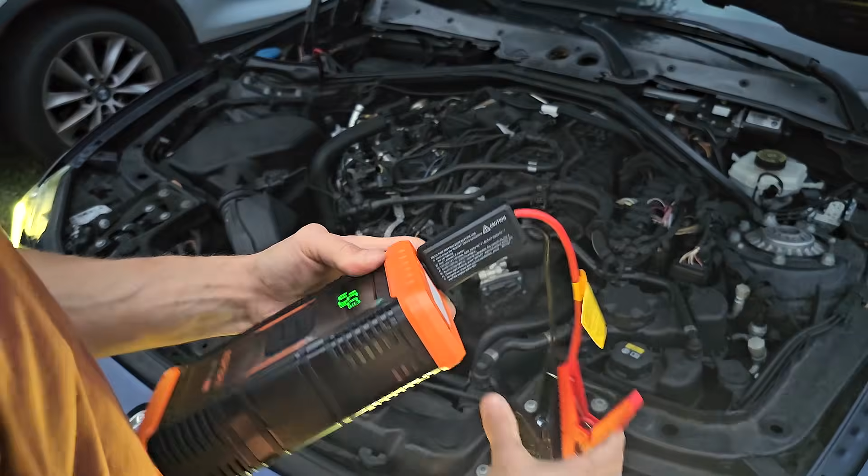So this is a good occasion to test my Asper X 3000 amp jump starter. I will connect this here, positive to positive, negative to negative. I need to push this button. Let's see now, let's try again.

Oh, perfect. Okay, let's drive this car in the shop.

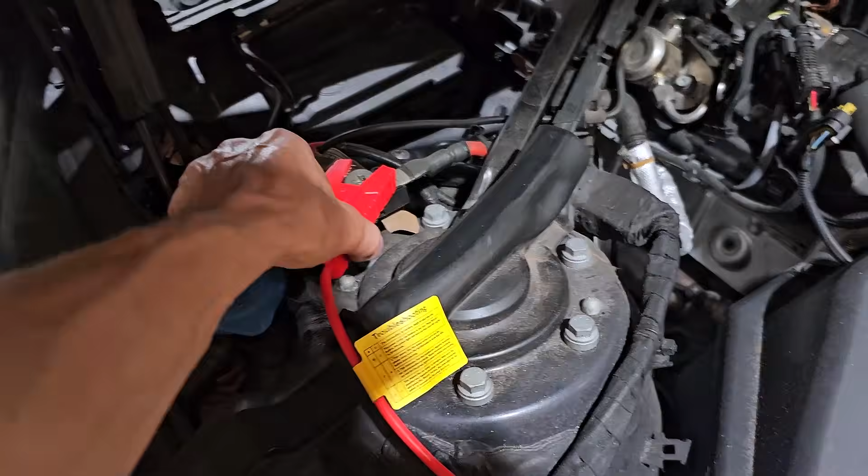So I made it in the shop. What you can see here, this was the actual state of this car. Let me disconnect my jump starter. So yeah, this thing, it's working. I'll put it here. So I diagnosed this car.

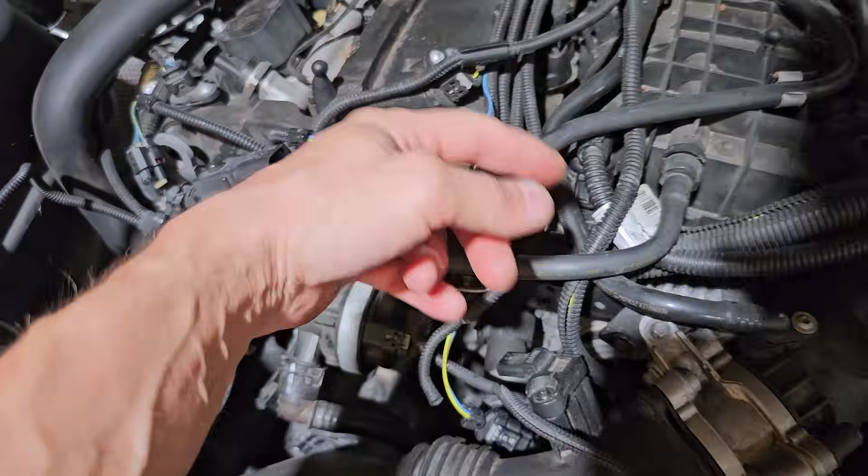I did some checks on the field. I disconnected a couple of plugs, but I didn't pull the harness like this. This was done by someone else, you can see. Even they cut wires. I think all the parts are inside of the car. Also, the accelerator pedal was unscrewed, removed. They cut the wires, they did some checks, but the way that they worked on this car was a barbaric way of working on vehicles.

Oh yeah, so I have parts here. That's a good thing.

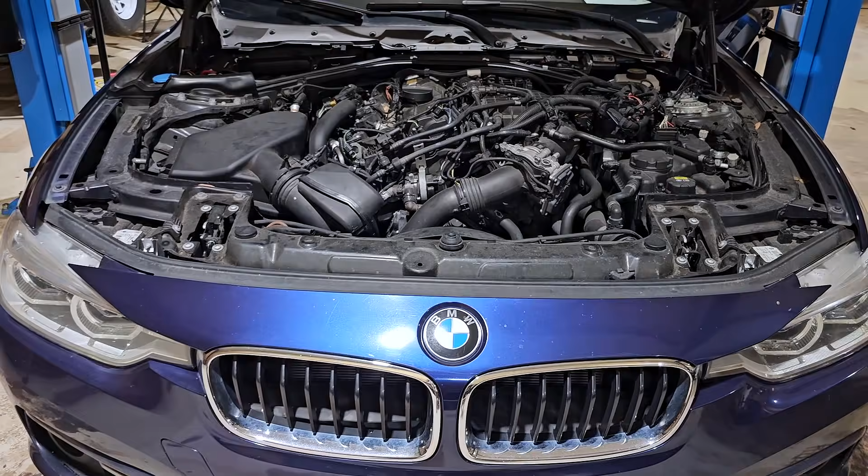So from what I know from the owner, this car was in a specialized Euro shop here in Orlando over a year ago. They diagnosed this problem and they replaced the DME because there is a short circuit on a 5 volt line, an internal short in the DME. They replaced the DME, they charged the owner, they cloned it, I don't know what they have done, and the car is doing absolutely the same thing.

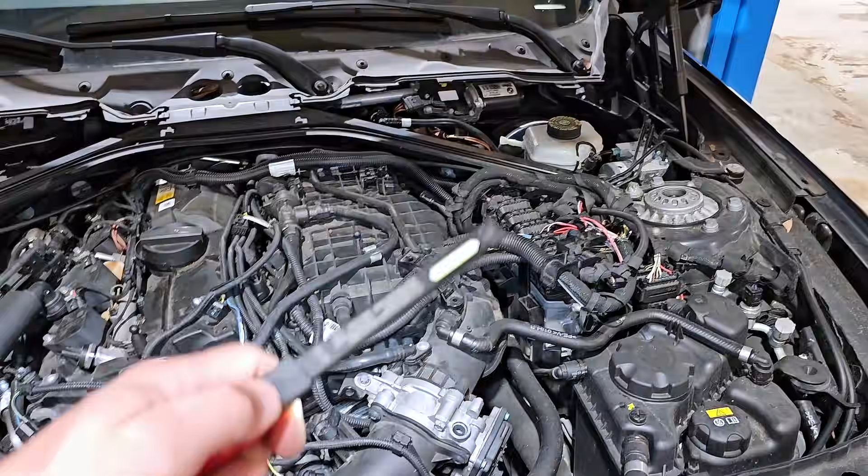I asked the owner about the original DME, if he has it, and he told me he doesn't have it. I asked him, hey, call back that shop to take back your DME because I'm pretty sure that your original DME is fine, especially when you have exactly the same problem with a replacement DME. So your DME is fine. He told me he tried to call them, but it's been over a year and they don't have it anymore.

So at this point, let's start to diagnose it together. I will show you my steps that I will take, and I will try to diagnose to see what is the deal with that short circuit.

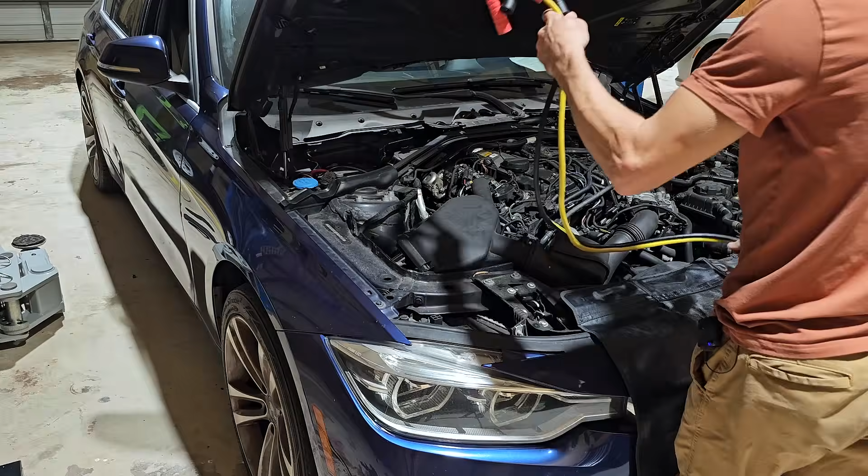First thing, I need to connect a battery maintainer, voltage maintainer on this car because the battery is dead. Plus, minus. Yeah, so you can see the battery is not maintaining voltage anymore.

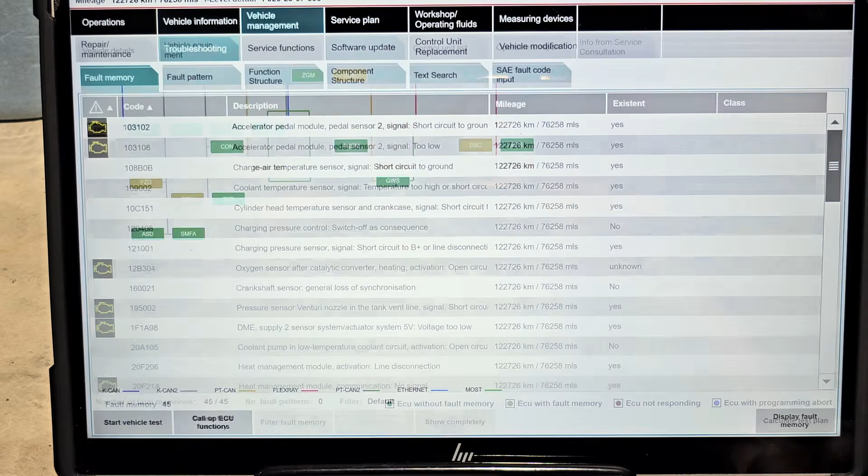Let's resolve that. And after that, I will connect ISTA and I will scan the vehicle. So after scanning the car, I have a bunch of errors, but most of them are caused by that weak battery. So I will display the fault memories. I will take a look, crankshaft sensor, heat management module.

So all these modules are disconnected from this network. They are unplugged because I told you I also worked and tried to see if I can find out something quick in a parking lot, but that didn't happen.

So you see, DME supply 2, sensor system actuators, system 5 volts, voltage too low, and it's present, voltage too low. So this error is in the DME. The DME is in charge of providing these 5 volts. Also, we have a bunch of other errors.

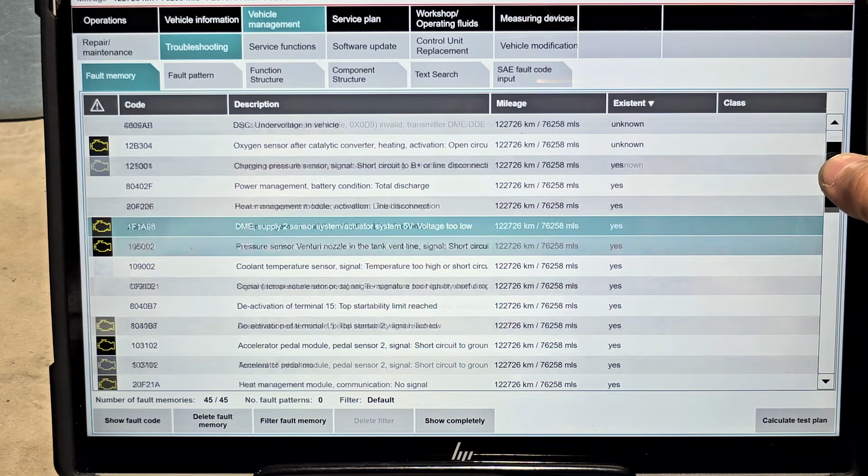Let me go like this to have all the present errors on top. Pressure sensor venturi nozzle, deactivation, terminal 15 for the battery. Accelerator pedal module, pedal sensor 2, signal too low, present. I think this is one of those cut wires on the DME.

But first, the most important thing is to save a report before doing anything else on the car. Next, I will delete the fault memories to work only with the present errors, because that will be way easier and quicker to calculate and execute a test plan.

Okay, so we ended up with 13 errors. DME, transmission and ICM, everything is green.

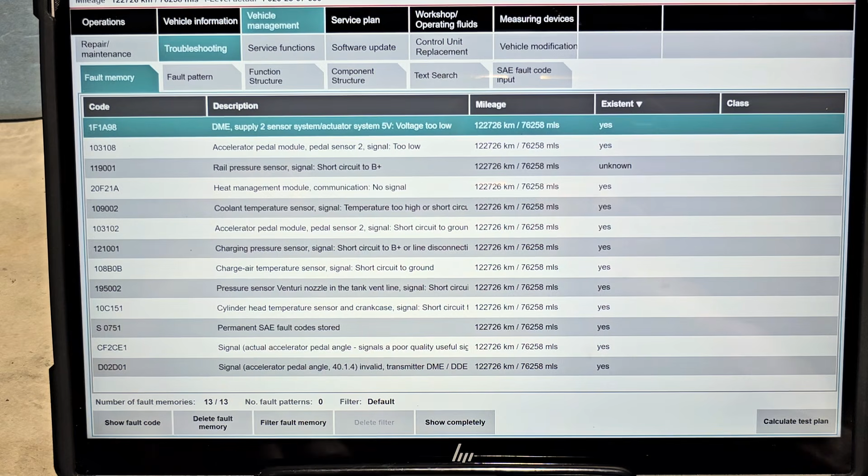So we have DME supply 2 sensor system actuator system 5 volts, voltage too low and is present. Accelerator pedal, rail pressure sensor, heat management module, coolant temperature sensor, accelerator pedal module, charge pressure sensor, charge air temperature, pressure sensor, venturi nozzle, cylinder head temperature sensor and crankcase, permanent SAE fault code stored because of those.

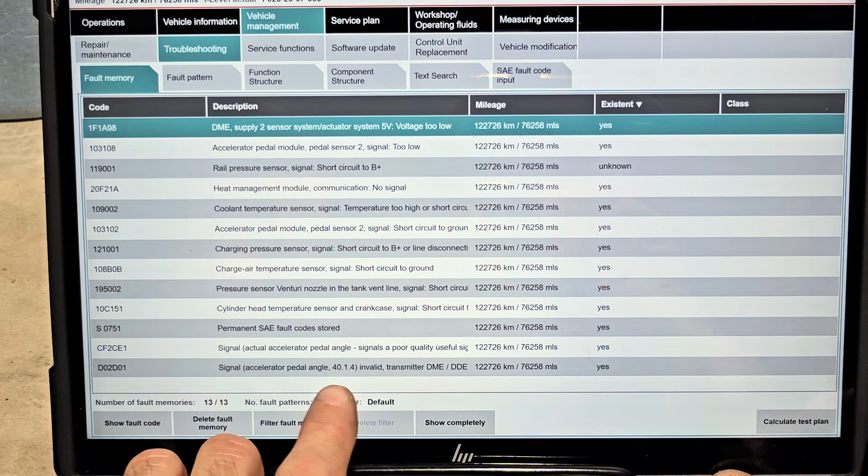And signal, let's see, let's show completely. Signal poor quality use, signal. So yeah, those two errors on the ICM and transmission are caused by the DME because of all these errors.

Now let me see, I'm curious to see what is the service measure for this error. For example, measure in service.

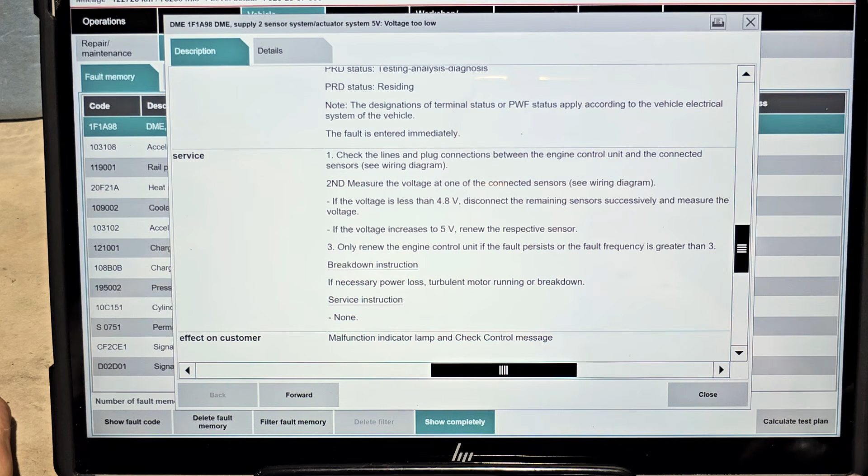Let's see here. Check the lines and plug connection between the engine control unit and connected sensor. See wiring diagram. Second, measure the voltage at one of the connected sensors. See wiring diagram. If the voltage is less than 4.8 volts, disconnect the remaining sensors and measure the voltage. If the voltage increased to 5 volts, renew the respective sensor. Only renew the engine control unit if the fault persists or the fault frequency is greater than 3.

Breakdown instruction if necessary: power loss, turbulent motor running or breakdown. And the effect on customer: malfunction indicator lamp and check control message.

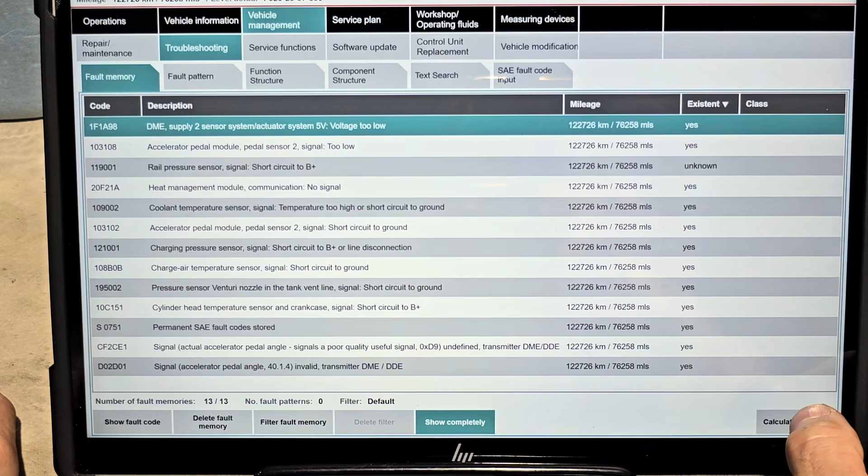Okay, let me calculate a test plan because I need to see the wiring diagram and work on that. So let's remember, we have a test plan for the accelerator pedal, charge pressure sensor, coolant temperature sensor, heat management, intake pipe pressure sensor, venturi nozzle, temperature sensor, high pressure fuel system.

Okay, let's select, because ISTA gives us the most important at the top, the second one, sorry, we'll select the second one. Sensor system supply 5 volts, we'll calculate the test plan.

DME supply 2 sensor system, actuator system 5 volts. Again, we have the same information here on the details.

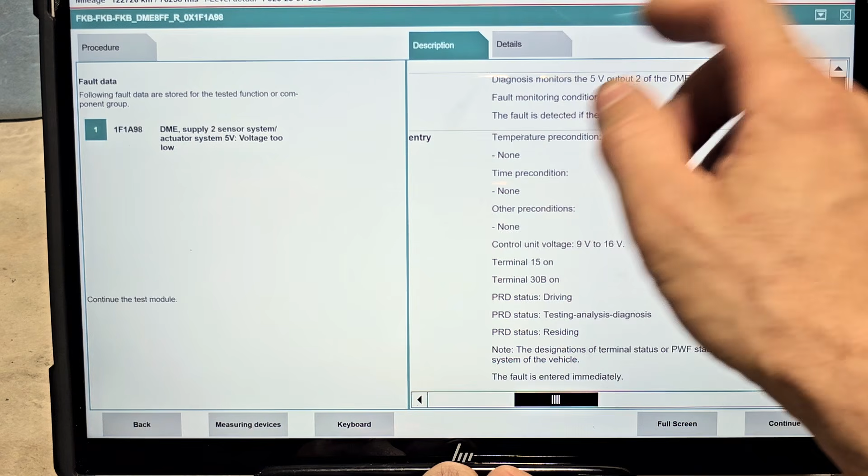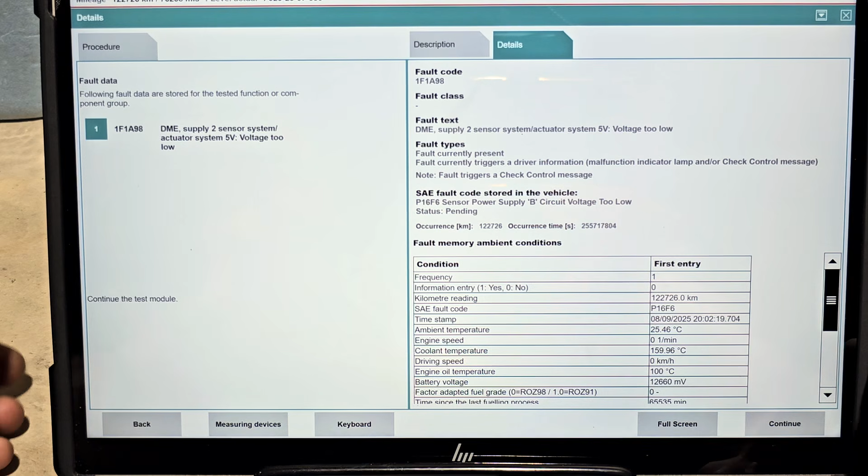Supply sensor 2, voltage too low, fault currently present. This is a good thing because it's easier to work with a fault that's present. Let's select that one, let's go ahead.

Check sensor wiring and plug connection, check control unit and test module. Let's say check sensors first, wires and plug connection.

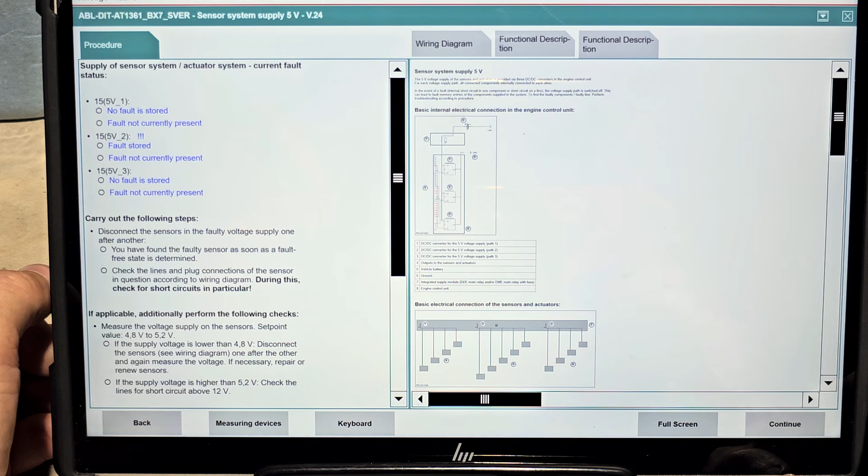So supply of sensor system, actuator system current fault status. So on line 5V1, no fault. 5V2, fault stored, fault currently present, and 5V3 is the same, no fault.

Let's go in the wiring diagram. Let's see what is the deal with the 5V2.

So for this I will go here in full screen. I will extend this wiring diagram. So this big thing from here is the DME, digital motor electronic, and everything here are sensors.

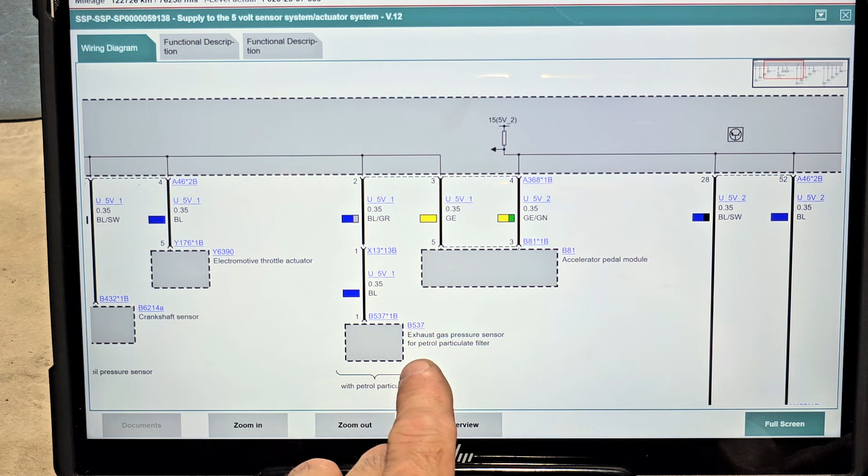Inside of the DME, you see we have a branch here that will supply these branches for 5V1. 5V1 will supply throttle actuator, crankshaft sensor, engine oil pressure sensor, exhaust gas pressure sensor for petrol particulate filter, and half of the accelerator pedal module.

The other half of the accelerator pedal module, the 5 volts, will be supplied by 5V2. So we have a problem. We saw that we have a problem on 5V2.

Okay, go back full screen. So on this particular line there is a short circuit, and also we have the 5V3, but this line is again healthy. So from what I see here, the 5V2 will be provided by the DME to 3 different plugs.

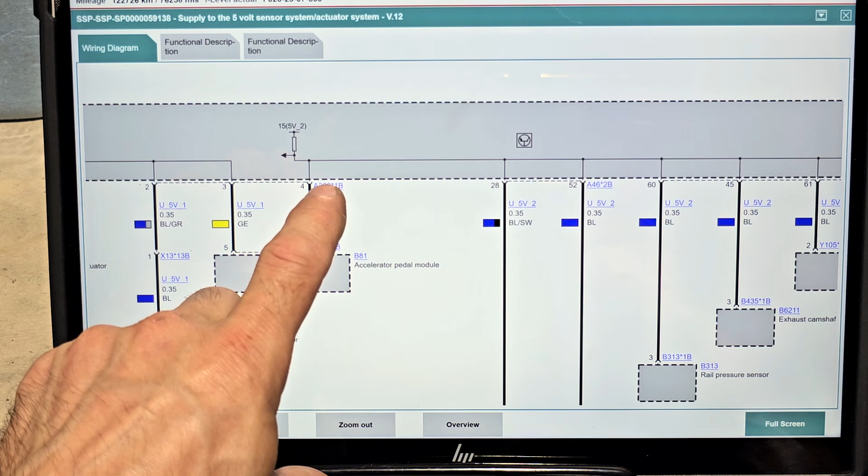I know that because I can see here this pin for the accelerator pedal module, it's in plug A368-1B. These two supplies are on A46-2B, and the rest of them are in A46-3B. So let's see which plugs are these ones.

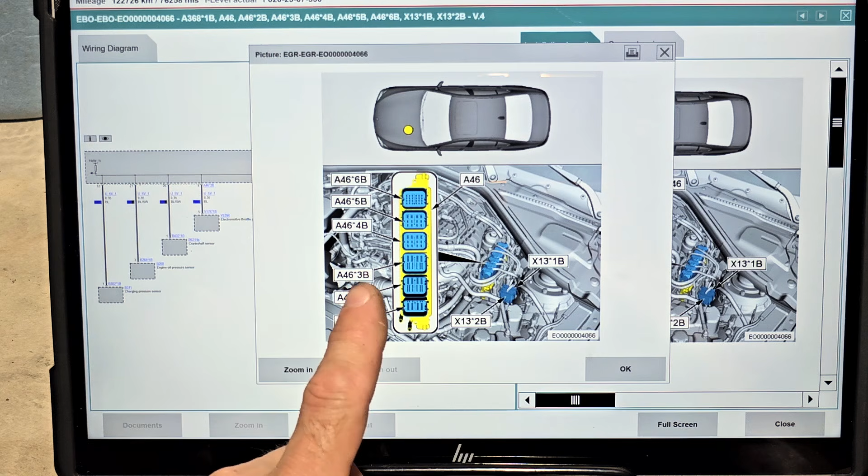So you go installation location. So you have in A368-1B, this is the accelerator module, and A46-2B and A46-3B are the second plugs for the other sensors that are on the DME.

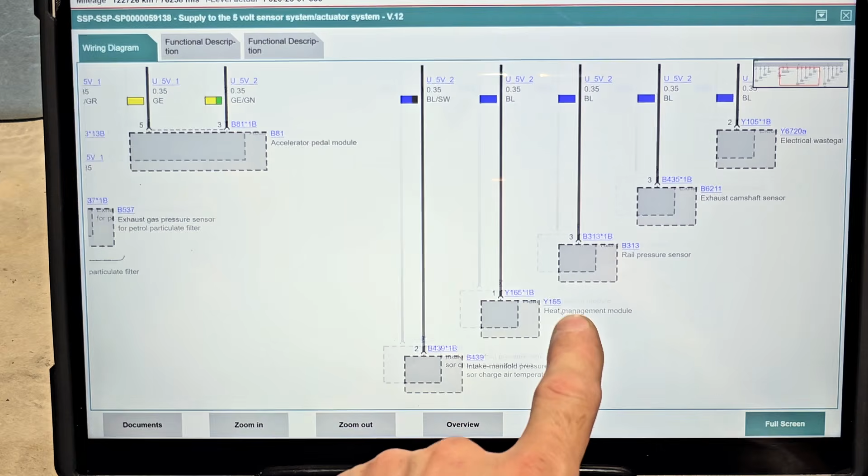Okay, so from here we know that intake manifold pressure sensor, heat management module, rail pressure sensor, exhaust camshaft sensor, electrical wastegate valve, and on this side we have pressure venturi nozzle. All these sensors are supplied, they are in this 5 volt network.

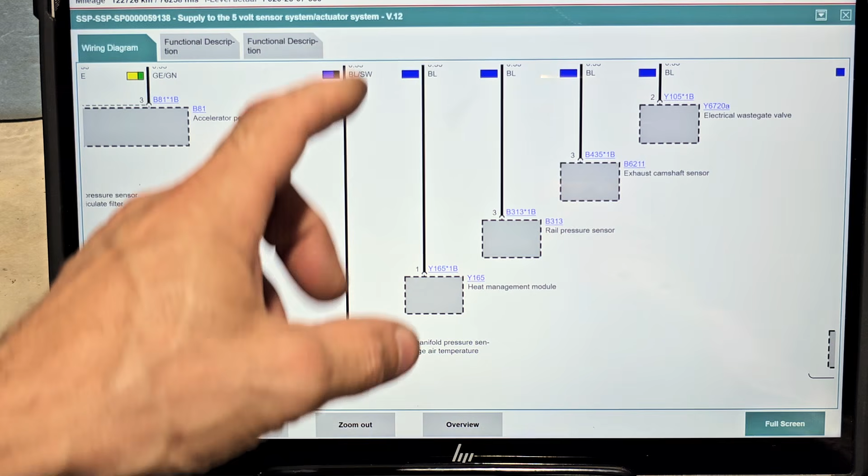The test plan told us to disconnect one sensor, check voltage, and if we are low on voltage, disconnect the rest of the sensors until the voltage returns. If the voltage won't return back, that means there is a physical problem inside of the DME.

So with that in mind, already we see here the venturi nozzle disconnected, the high pressure fuel rail sensor disconnected, this is the turbocharger pressure sensor, the heat management module is disconnected. Even here, this is the intake manifold temperature and pressure sensor, it's disconnected also. And this one is from the wastegate actuator from the turbocharger. So from what I see here from the get-go, everything is disconnected.

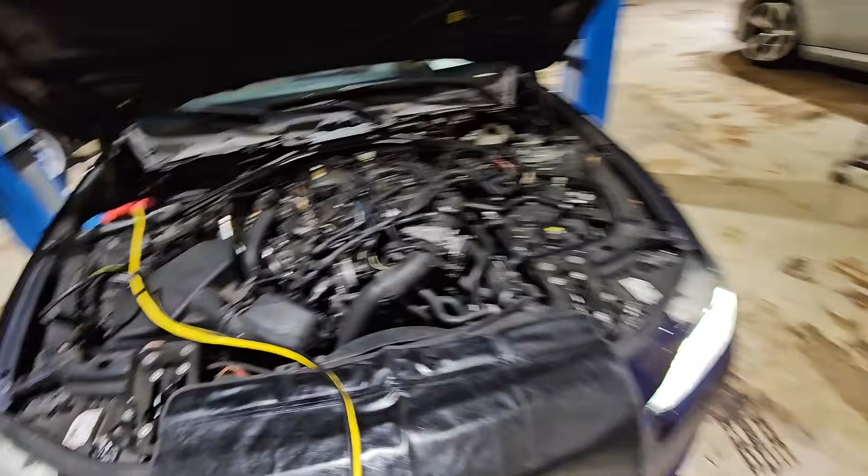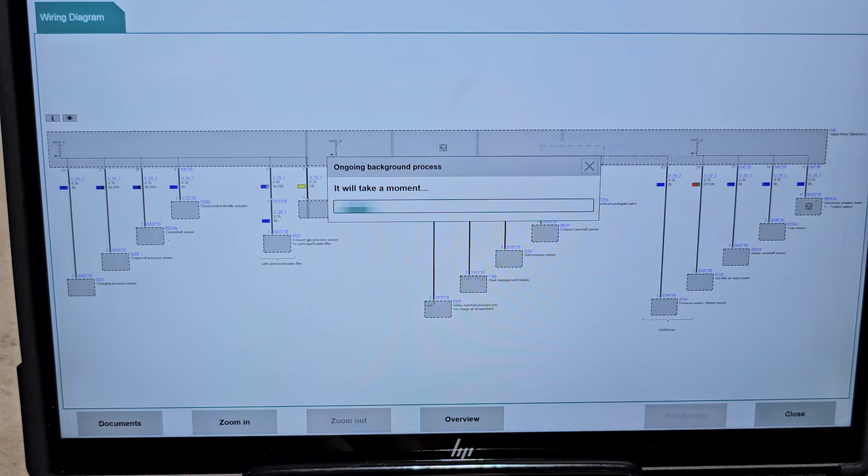But if you ask, hey, I don't know where this sensor is on the car, the intake manifold pressure sensor, that's not a problem. You see here B439, if you click on that, it's blue, it's clickable, it will show you the sensor and everything you need to know about it. You need to be too stubborn to not read this information if you don't know anything about that.

And also we have here a tab with installation location. And installation location, you can see here, B439-1B, it's here next to the oil filler plug. So like that you can find out every single module, every single sensor from here. You can know its location and how this sensor is looking.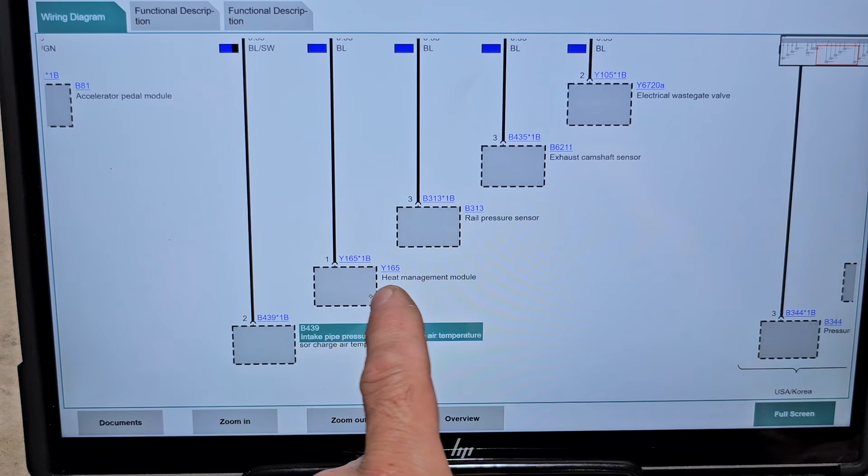Next, let's see the pressure sensor venturi nozzle. This one is the first one that we have here. In pin 3 we need to have 5 volts. Let's also compare with what else we have here. I saw that the turbocharger sensor is disconnected and is not here. Charge pressure sensor - so the charge pressure sensor that was disconnected is not in 5V2, it's in 5V1.

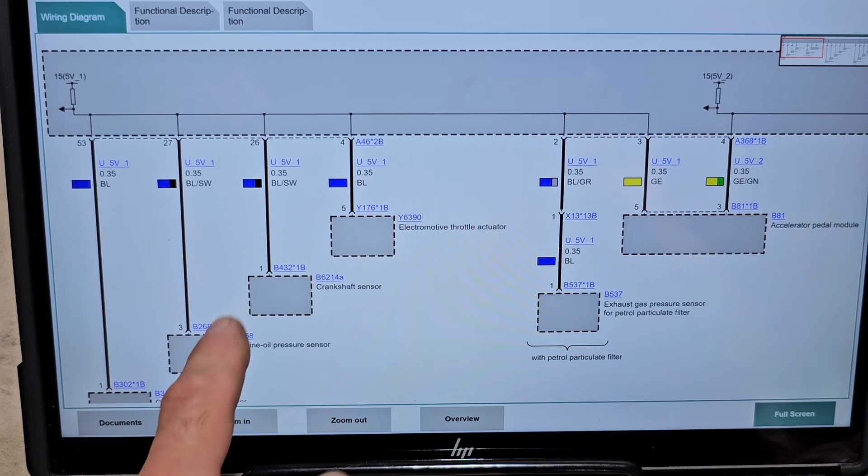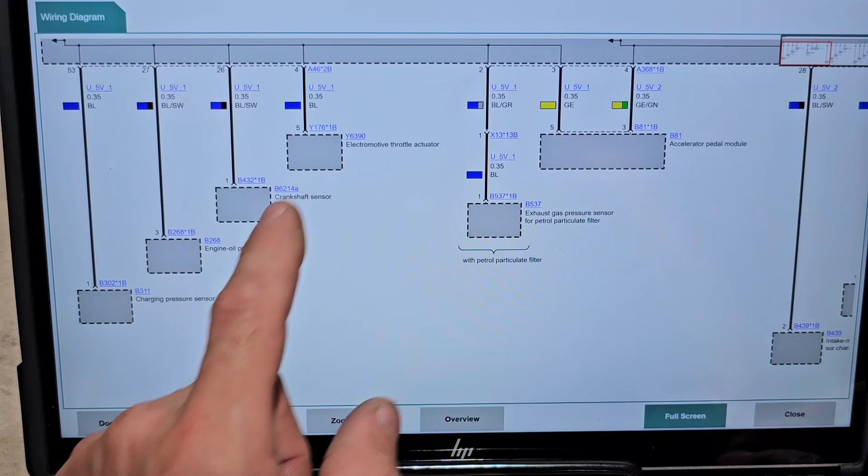So on this sensor, it's pin number 1 that is the 5 volts. Oh, you see, sometimes you get that message - component location. So this one, it's here, but what is this? Component description, sorry, component location is this one. Okay, 311. So remember, pin 1 is charge pressure sensor, and pin 3 is pressure sensor venturi nozzle.

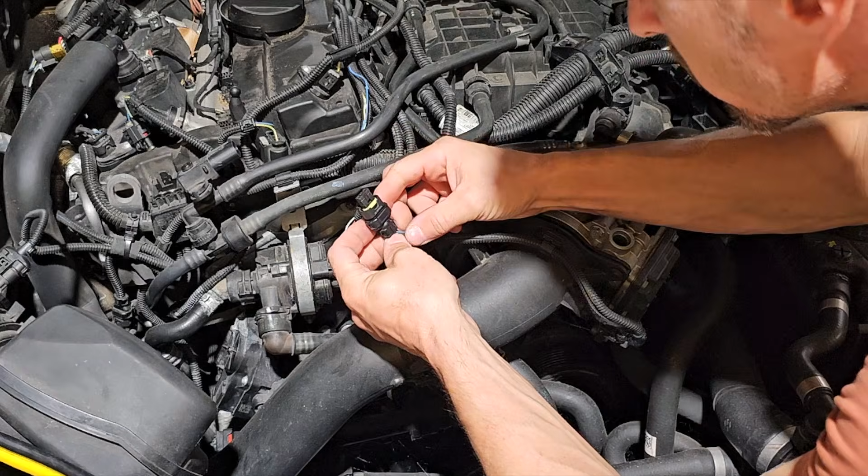So charge pressure sensor pin 1, it's a blue wire, yeah, this one, and venturi is pin 3. Okay, next I will use some pins to connect with those plugs. I have here some pins saved from different harnesses from BMW, and I will use those. I will probe in the front here and also in the front here.

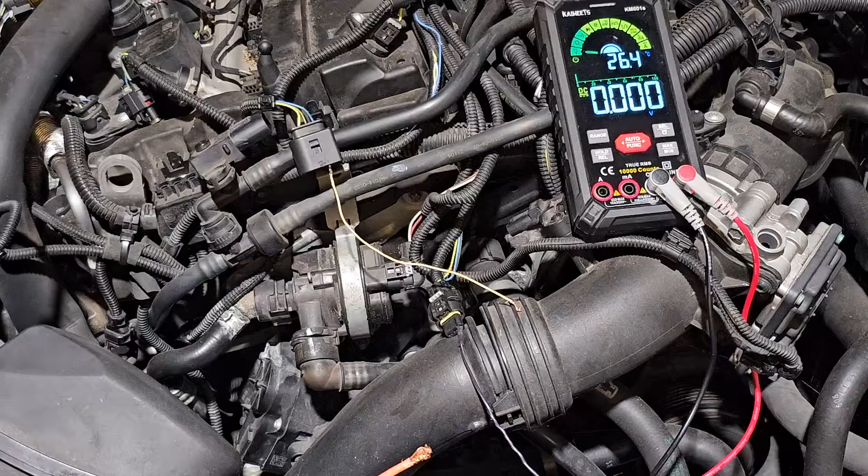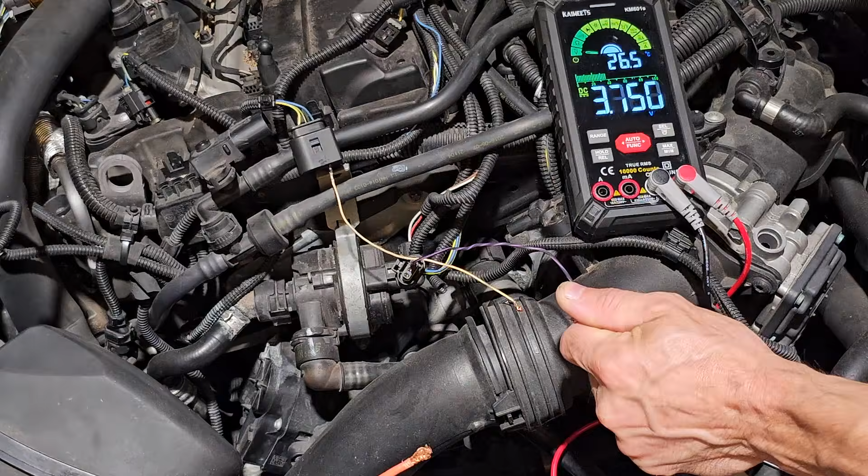Now with my multimeter, I will go and select voltage like that. The negative one we will use the throttle body. Let's make sure we have a perfect connection, so I will connect to a screw on the body. And let's try to see on the turbocharger pressure sensor if we have 5 volts. Yeah, so we have 5.01. Awesome, that is 5V1. Now let's measure the 5V2. And 5V2, it's 0. Okay.

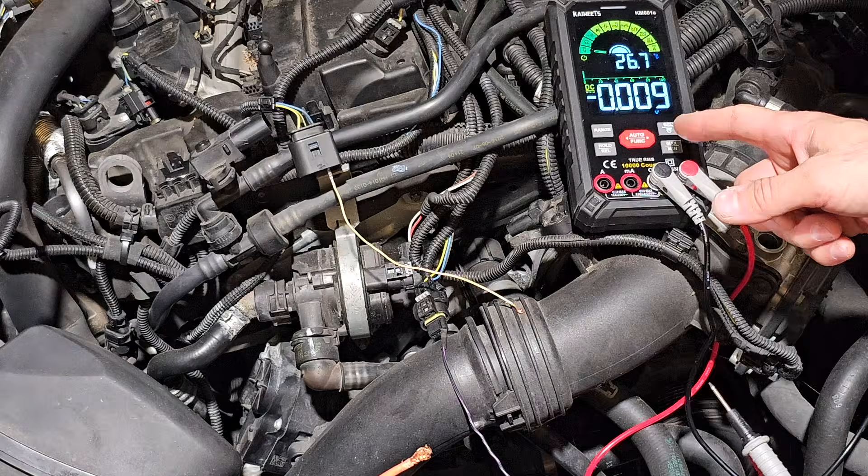So that means there is a problem in the harness or in the DME for that. Next, let me try to see, but before that I will switch off the ignition. I have switched off the ignition. Let me go in buzzer mode, in continuity. Okay, I will connect here and let me see on ground. Oh, we have here on the throttle body ground.

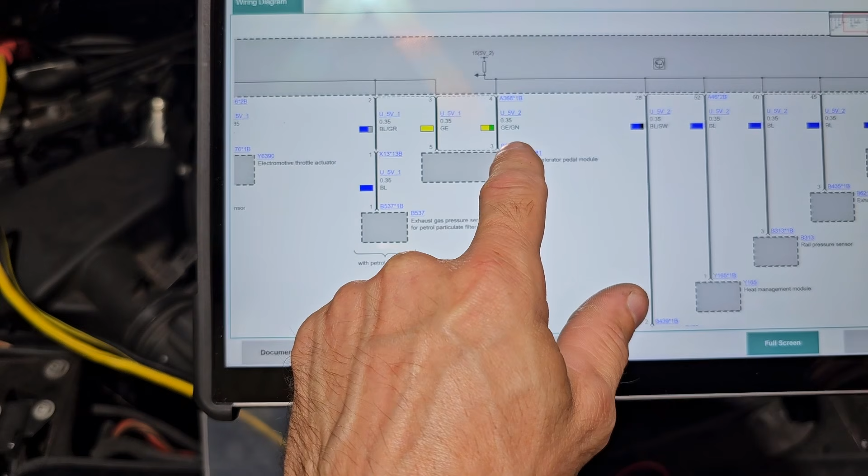So it's a permanent short circuit to ground. So from what we know from here, we need to disconnect all these sensors to make sure the short circuit is not in one of them, right? Accelerator pedal module - let's start with this one. B81-1B is the pedal module.

Yellow with green from plug A3681B. A3681B is the first plug. So this is the first plug, because this is the plug that goes inside of the vehicle. All the plugs from here are connected to the engine. Only this one is connected to the vehicle, to the chassis, to everything related inside of this vehicle.

And I'm pretty sure, yeah, you see the color of this wire? Green, yellow with green. So yellow with green - someone did a, I don't have words for that. They cut and destroyed this wire to do some diagnosis. You don't do that on a customer vehicle. You are not allowed to do that, especially as a specialized shop, Euro repair shop. But with this here, we know for sure that the short circuit is not here.

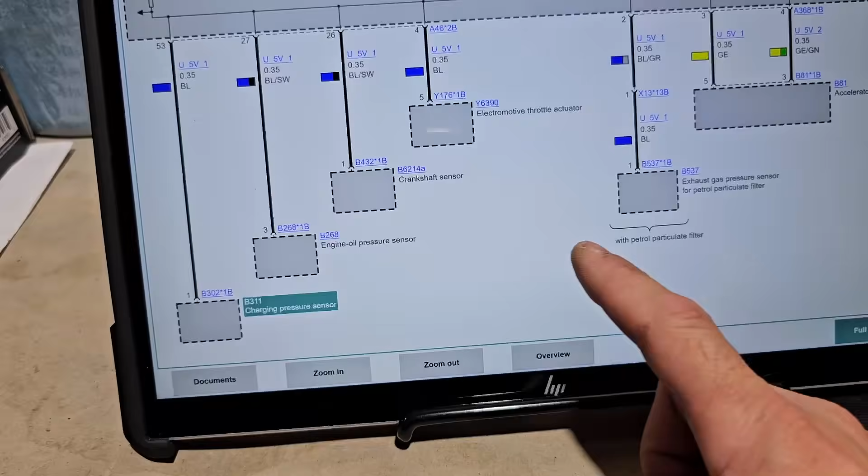Next, let's go to the next sensor. Zoom out a little bit. Next sensor is intake manifold pressure sensor. Let's connect this. The short circuit is present. Intake manifold pressure sensor - it's already disconnected, and we can see the pin blue. Let me see again, blue with black, pin 2. Next one, heat management module.

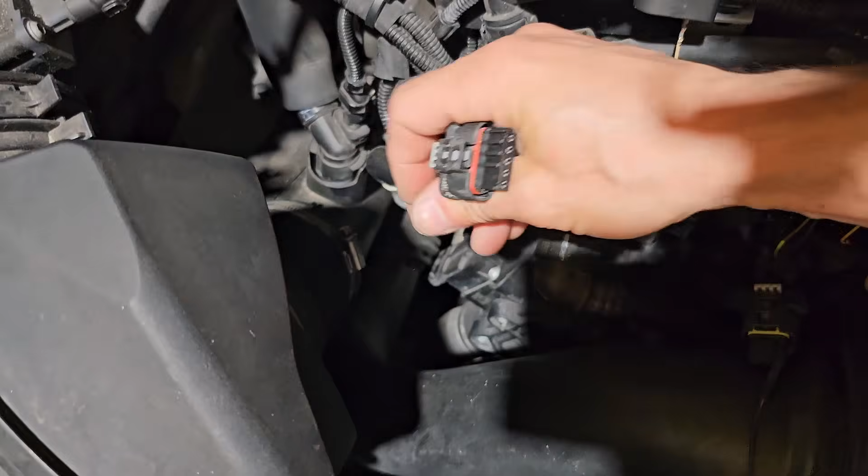Let me make sure the heat management module is the module I know it's a heat management module. So we'll hit here installation location, and it's down here. And it's that from there, and this is the plug, is disconnected, and we can also see here a blue wire in pin number 1. Let's go back here, okay, close this. Pin number 1, blue wire.

Next module, so these modules are in A46-2B.

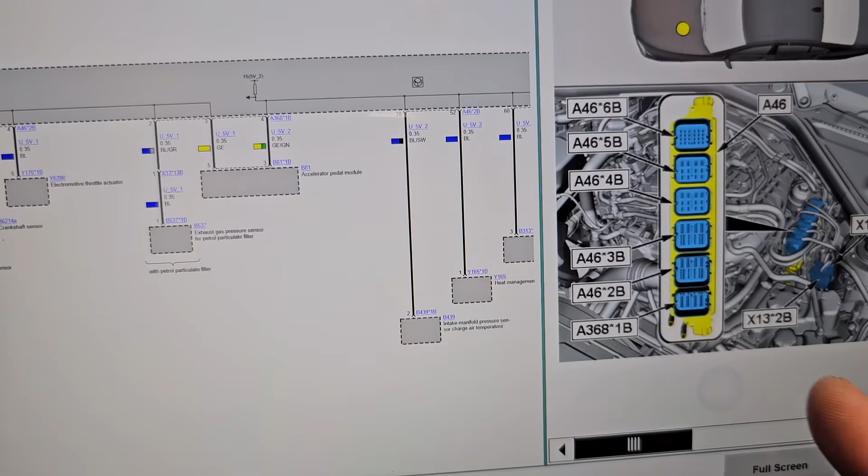A46-2B is the second plug. A46-2B. Next, rail pressure sensor, pin 3, blue. Rail pressure sensor is this one, it's already disconnected. The short is present. Pin 3, blue, yeah it's here. So that is disconnected. We still have a short to ground.

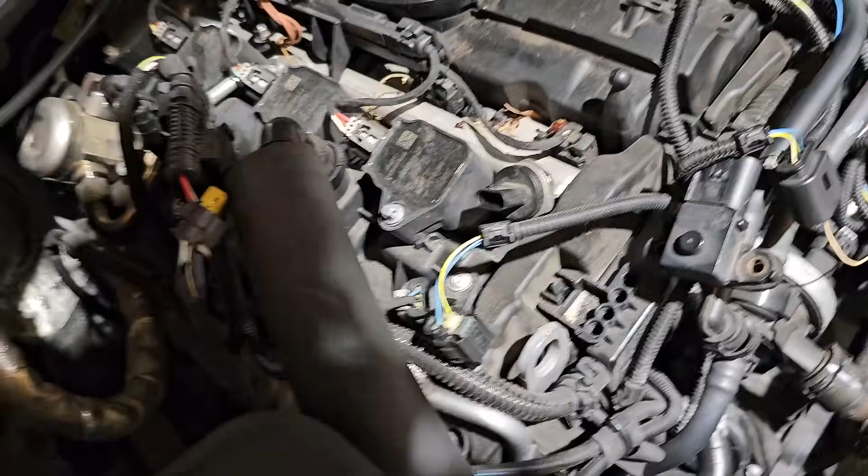Next, exhaust camshaft sensor. Exhaust camshaft sensor is this one from here. Okay, let's see. Exhaust camshaft sensor is this one from here. Let me unplug it because it's plugged, and the short is still there. You can see the blue wire.

Give me a second, I will need to rescan the car. Okay, so we are back. We checked the accelerator pedal. We also checked the intake manifold, heat management, rail pressure, exhaust, electrical wastegate valve.

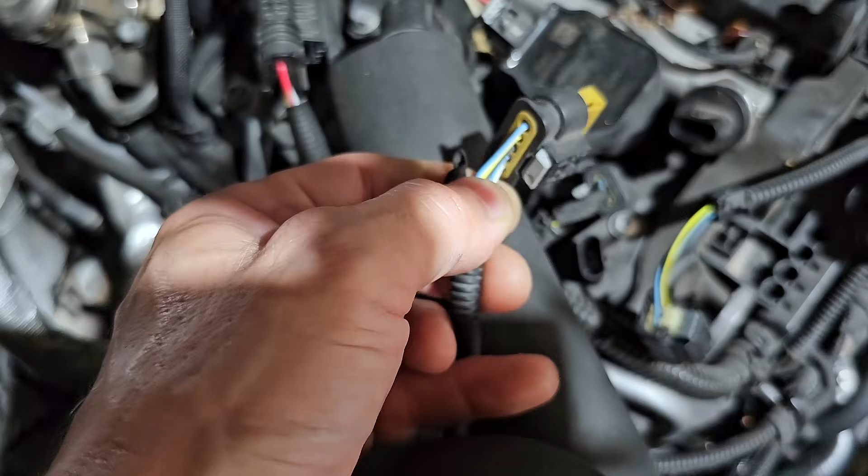Electrical wastegate valve, the same. Let me reconnect back my buzzer. It's short to ground. Electric wastegate valve is this plug from here, and the pin, it's one of those. It's blue. Yeah, it's a blue wire in pin number 2.

And the last thing from here is the pressure sensor venturi nozzle. This one is in the same plug with these 3 modules. So the venturi nozzle is this one from here where we are connected. So with all the sensors disconnected now and only the DME connected, we have a short circuit to ground.

At this moment, the specialized European shop that diagnosed this car, they were bingo, found the problem: DME, we have a short circuit to ground. Let's replace the DME. The only problem is after they replaced the DME, they had the same problem.

I'm dying to be there to see what they told the customer, what they lied to this owner about that problem, and especially how they could charge the customer for something that the customer didn't need, and the car is in the same state. At least if we had a different problem than before, yeah, we can say that DME was a problem and we still have something else to work on.

Either way, at this moment, probably most mechanics, specialist shops, they will condemn that DME. But we need to make sure, because that DME is not a cheap part, it's quite expensive if it's new, especially if it's a new one, and cloning a used unit is expensive. So we need to give the customer the correct and accurate diagnosis possible.

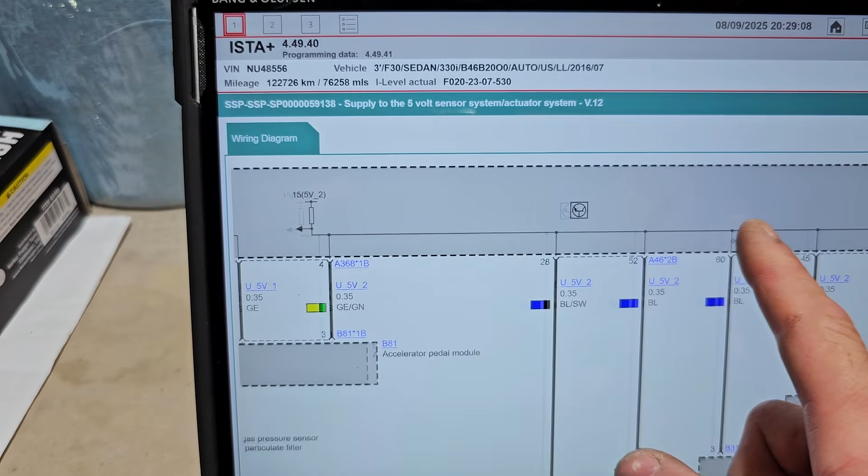Next step, from what we know from the diagnosis system for the wiring diagram, it's the 5 volts 2 network, the second channel. It's providing power to these 3 plugs. That means the first one will have that output 5V1 only on this pin for the accelerator module, and it doesn't matter where I measure the short circuit, we'll still have a short circuit to ground. Because even if we have different plugs, different pins, they are connected together inside of the DME. So inside of the DME, there is a common bus bar that will connect all these pins.

So let me connect back my multimeter to have that beeping constantly. So we are sure, we are 100% sure that the short circuit is not from the accelerator pedal, that someone probably diagnosed as being the main problem and that they cut the wire. And if we disconnect this plug, we completely separate that part of harness with the accelerator pedal, with everything, but even so we had this wire cut, so this plug was separated.

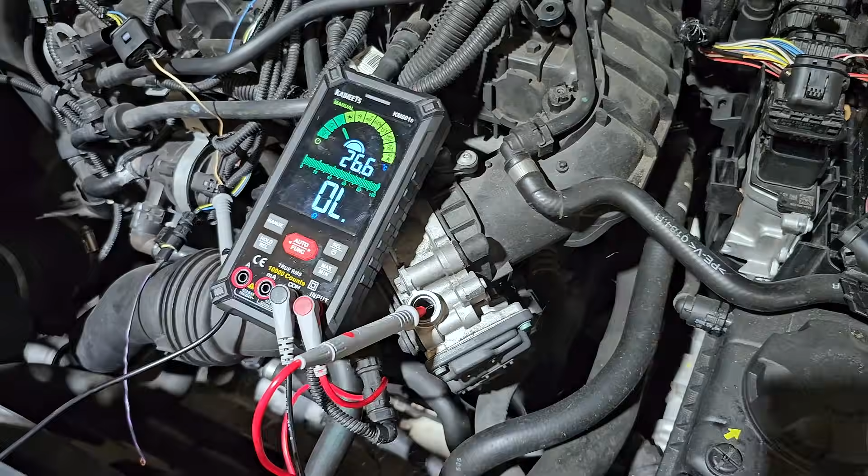Next, I will disconnect this plug. And when I've done that, my short circuit, it's gone. It's an open circuit, but don't jump the horses, wait a second.

So we disconnected this plug, but we need to make sure that maybe in this plug, the venturi nozzle is connected. So when we disconnect this plug, we separated the venturi nozzle harness from the DME and the rest of the sensors. So let's see, where is the plug for the venturi nozzle? Pressure sensor venturi nozzle, it's in A46-3B.

Installation location.

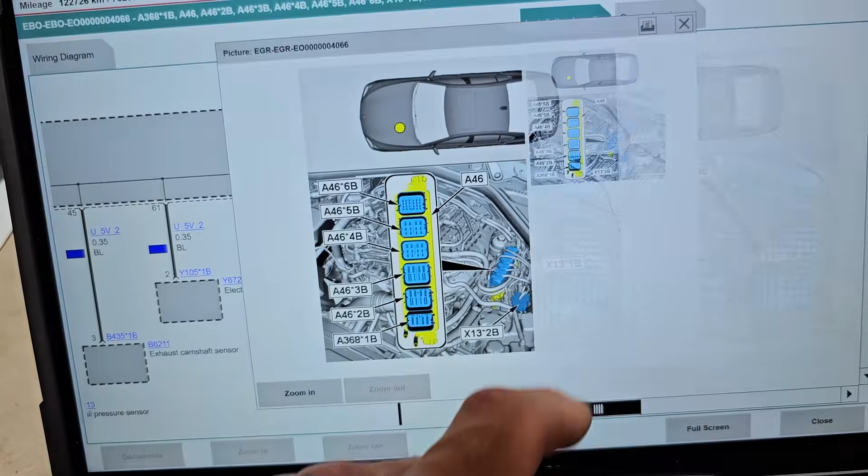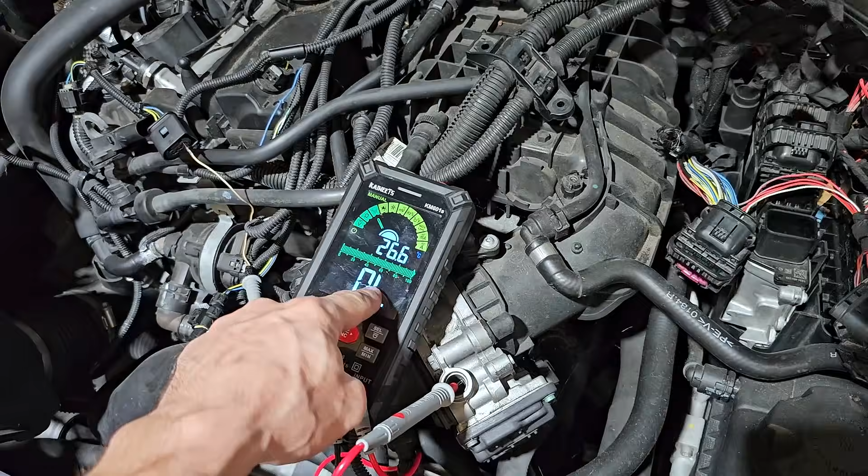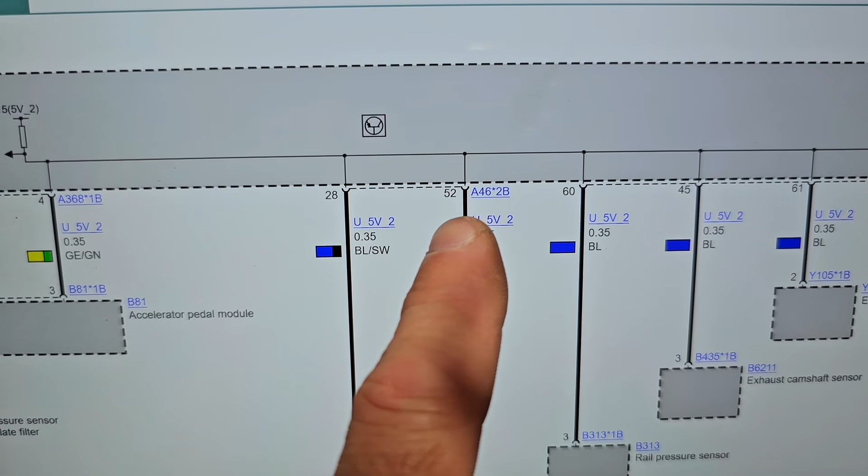Now we need to find the short circuit itself, with that disconnected, that being A46-2B. Let's open it again. A46-2B. So in A46-2B we have only 2 sensors: one is the heat management module, and the second one is the intake manifold pressure sensor.

So that and that from there are connected in this plug. So one of those is shorted, but they are disconnected. Let me connect my pin here. So the blue pin, look how they destroy the wires, you see? They pinch the wire. You don't do that.

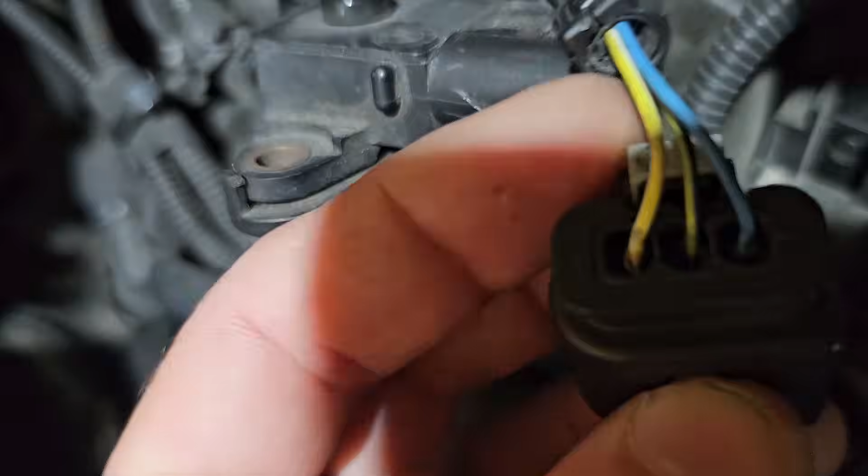You are not allowed to do that. In the future, this harness is compromised, because everywhere they pinched the wire to measure voltage, they destroy the insulation of the wire. Look, even here. Humidity and moisture will enter, the copper wire will oxidize and there will be an imperfect connection. So this harness, it's a time bomb, but that is not our problem now.

So let me connect this in pin 2. Okay, let's make sure that it's in pin 2. Maybe we're measuring something else. Intake manifold, pin 2.

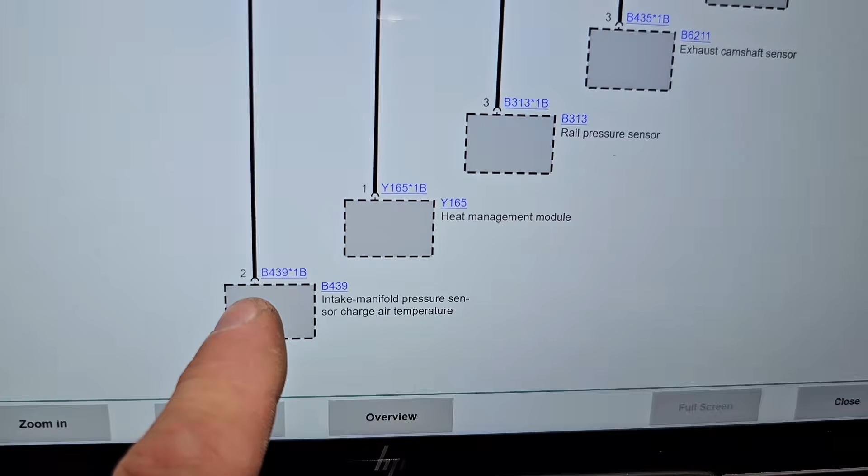So with this plug disconnected, we have a short circuit in the harness. Let me try to see. So the harness for the heat management module is this one. It's coming here. Look, they pinched here because that is the harness, and it's going down there. This harness from here, the same, it's going down there.

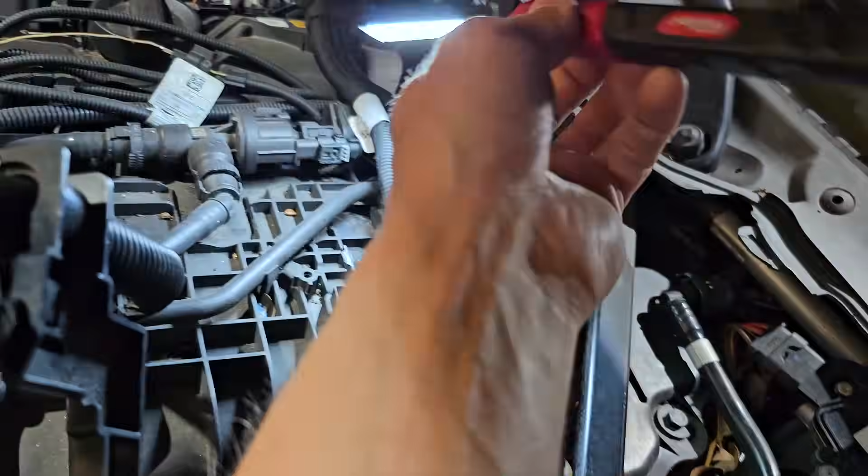Probably some of you already are screaming, you know exactly what is the problem here. Most of you don't know. I think I know, but let me show you, let me make sure that I am completely right. Give me a second to find a way to mount this light like that. So we say that, okay, it's enough beeping.

We say that this harness is for the heat management module and is going down. You see, it is moving. And this harness is for this sensor, but I cannot move it. It's very, very hard, very stiff. Probably it's tied with something, or on the engine block, or maybe...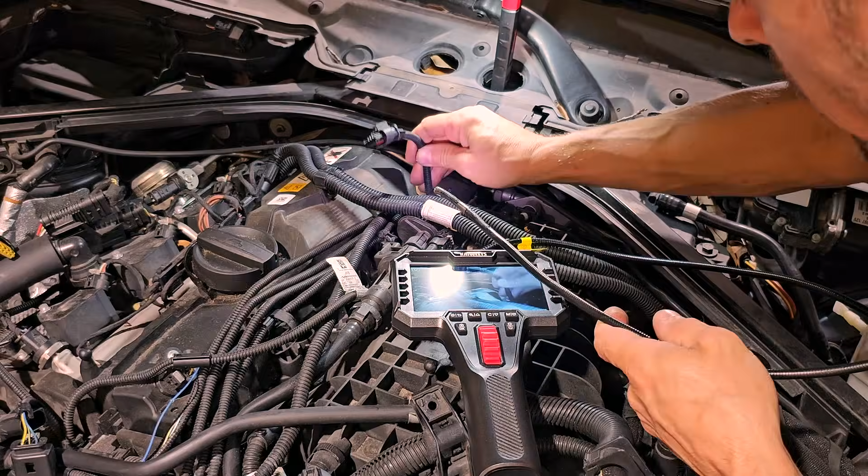Let's take this guy, there is something else. So let's see, this is the wire for the sensor, this is the one for the heat management module. Let me see if I can go down there to follow this wire under the intake. Let's see if we can see something here. What is that? What is that?

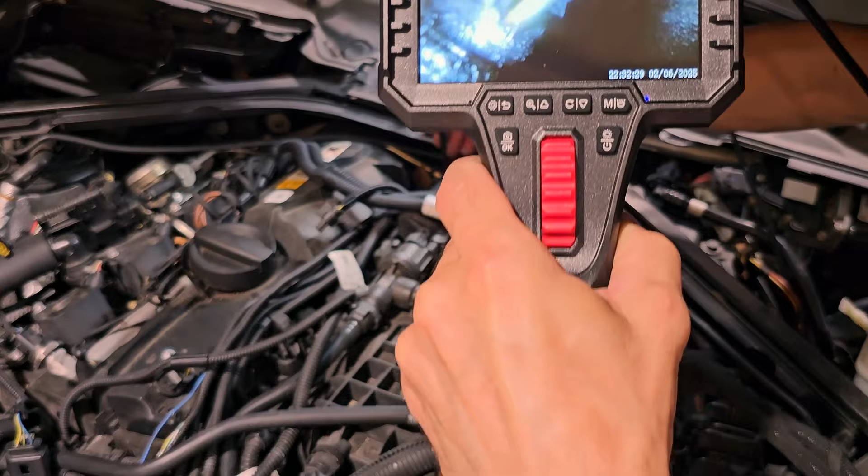I'm pretty sure some of you will already know what is that, and will be saying, wait, I know what is that. I think I know what is that also. Let me go down, because this camera is capable of doing a 360. So we'll go deeper and we will try to turn the camera up.

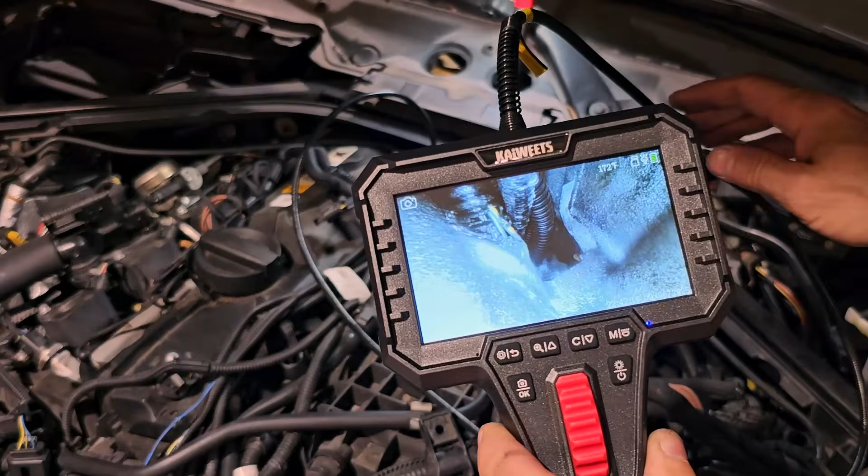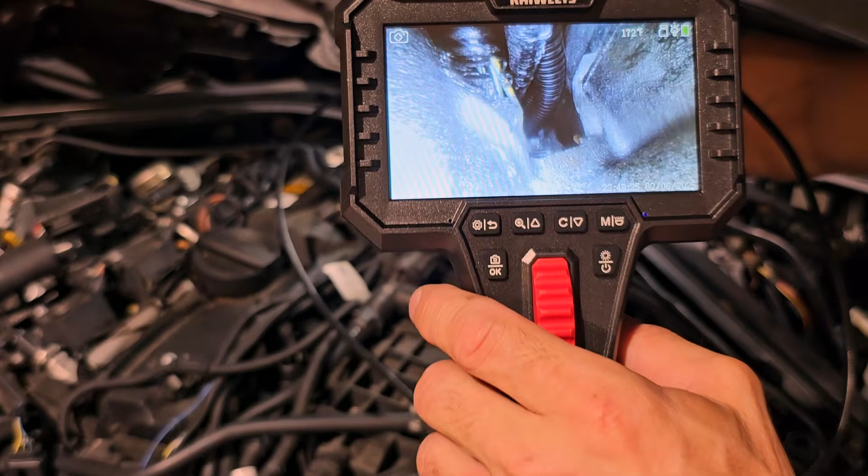Like that. And as you can see here, you see that? That is that harness. If I go even closer, if I'm not losing it, the harness is pinched. And I'm pretty sure that some of you already know what is happening down there.

If you don't know, someone removed the intake manifold of this car, and when they mounted it back, they didn't pay attention to the harness and they pinched it against the head and the intake manifold. This probably was done by a mechanic, a specialist, or the owner.

We'll never know. The most important thing is that even if you have the same problem with the same error, that doesn't mean your car's problem will be similar to this one. So please stop asking me, stop asking people online, 'hey, I have that P0 code, what is the problem?' I personally don't know what that P0 code is. I'm not interested, I will never know, because I'm using ISTA. ISTA will translate that code, and in ISTA we also have that test plan. Every single time when you have a problem, you need to do a diagnosis.

You need to diagnose the car to make sure what is the problem on your specific vehicle. It doesn't matter if you have the same error code, you can have a different problem. These DMEs will protect themselves. Every electronic module will protect itself against a short circuit, doesn't matter if it's the light module, DME, or so on. So in this case, I'm pretty sure if I remove the short circuit from this network, everything will be perfect.

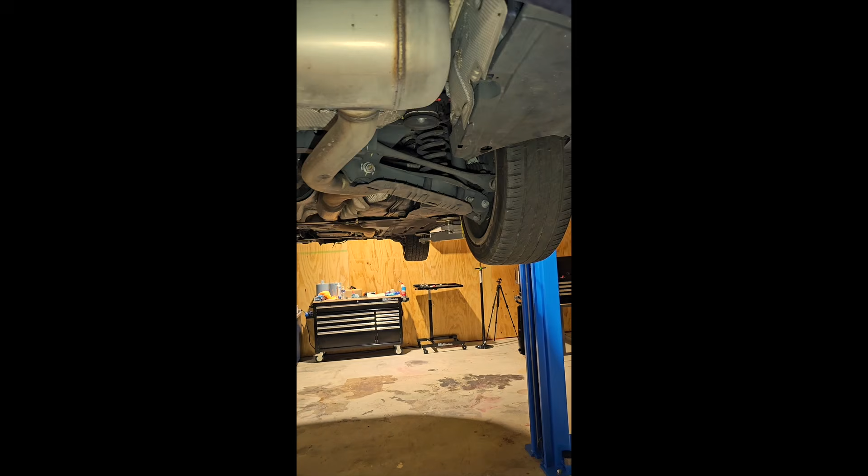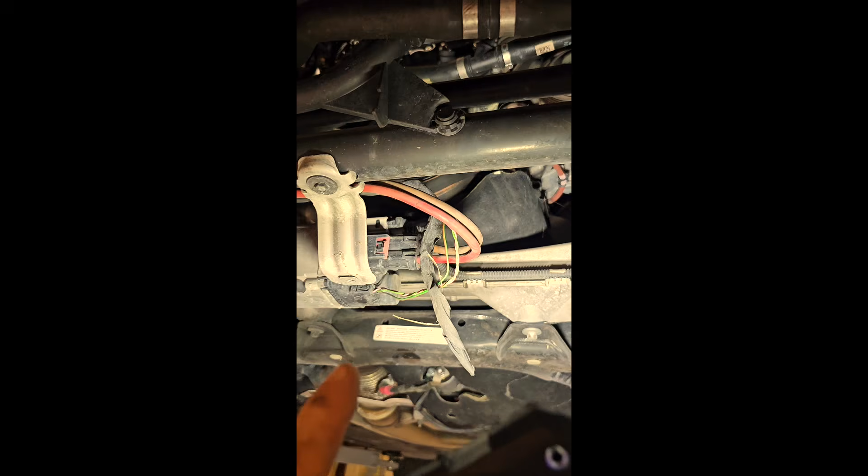With the information I have gotten until now, I also did a free visual multi-point inspection of the vehicle and added recommendations for future repairs. I've sent everything to the owner, and we will need to wait for his approval or denial. I'll tell you with more details about what I have found and what are the next steps.

And of course, he approved not replacement of the harness, but repair. So now I will start to dismantle everything here to have access to the intake manifold, to be able to remove it, to assess the damage created by the ones that worked here before.

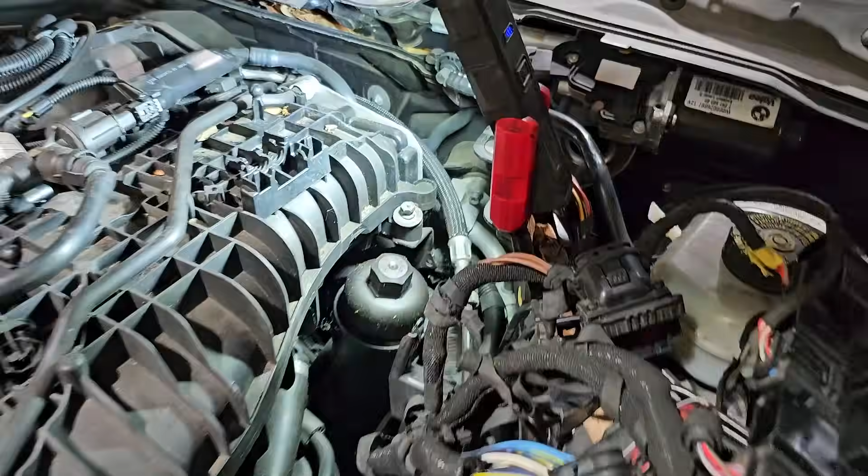Now I will start to disconnect the DME, the harness plugs. You can see the damage, the rat's nest that they have created by messing around with this harness. I will take care of it and make it look nice again. I need to remove the DME to have more access, more room. You can also see here some hardware misplaced by the ones that worked here.

Now I remove the tank vent system, disconnect the Valvetronic motor, and start unscrewing the intake manifold. Also, I need to unscrew the duct for the air on the throttle body, and the throttle body from the engine bracket.

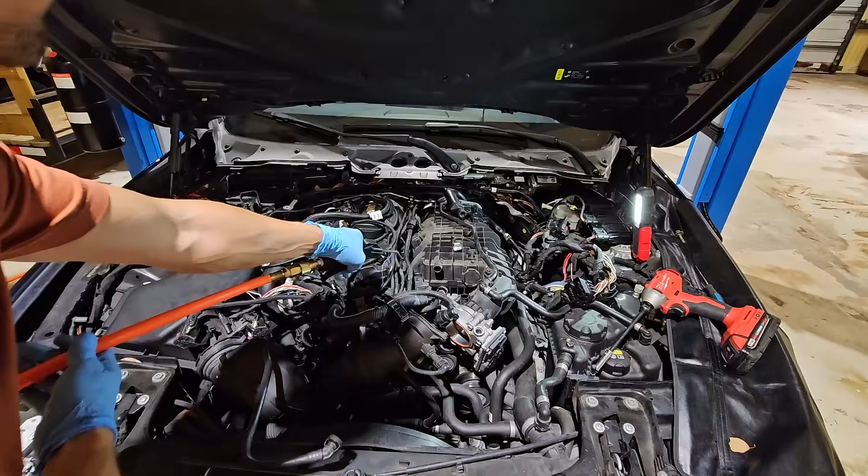Every single time you remove an intake, you need to blow off all the dust that can be found on it, because if you pull out the intake with trash or dust there, everything will go down inside the engine, and you don't want that to happen.

Now you can see the damage here. This wire was destroyed, pinched between the intake manifold and the head. The wire isn't cut, but it was pinched so badly that it shorted on the head.

Now I have some pigtails here, different wires with similar colors, and I will replace them. First I'll cut the old ones and prepare the new wires. I already soldered them onto the plug to make it easier to work. Now I'll connect back every single wire, color to color. There are only 4 wires, so nothing should go wrong here.

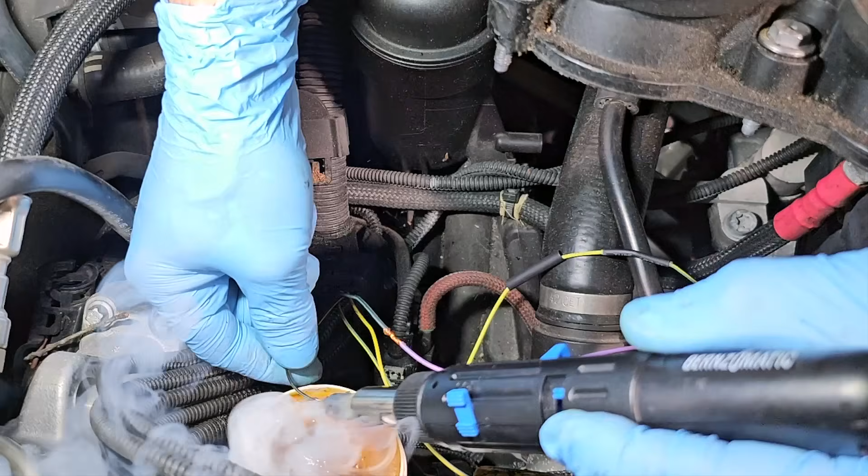Also, every single time I repair a wire outside of the vehicle cabin, especially outside the cabin, everything should be soldered and use shrink tubing with gel to prevent moisture and humidity from affecting the repair.

When you solder a wire on a vehicle, you always need a flat plier to flatten down the soldering job, because sometimes you can have pins from the solder or from the wire itself, and when you try to shrink the tubing, those will poke through it, and you don't want that. After that, you can heat the shrinking tube to shrink it.

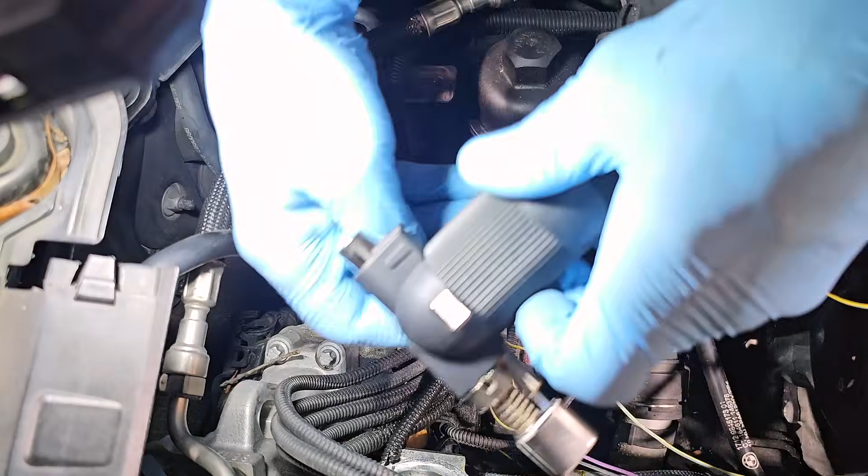On the wire, you need to make sure that special gel oozes out from the tubing, then you'll know you have a perfect water-sealed connection.

Now I'll put back the remaining insulation, and also use some Kevlar reinforced tape from Tesa. That's the tape BMW always used, especially outside of the cabin.

Now I'll make sure the harness is in its correct position. I'll clean the head and replace the gaskets on the intake manifold. Now I can mount the manifold back, making sure everything slides in perfectly. I need to double check the harness again against pinching, and now I can torque back the intake manifold onto the engine.

Put everything back, this time correctly, not like the last time, and start reconnecting the sensors, harness, vent lines, vacuum lines, and so on. Of course, I will also repair the damaged wires that were damaged by other people who worked on this car.

Put back the caps that I found laying around the engine compartment. Double check to make sure all the plugs are connected and secured properly, and nothing is pinched or damaged.

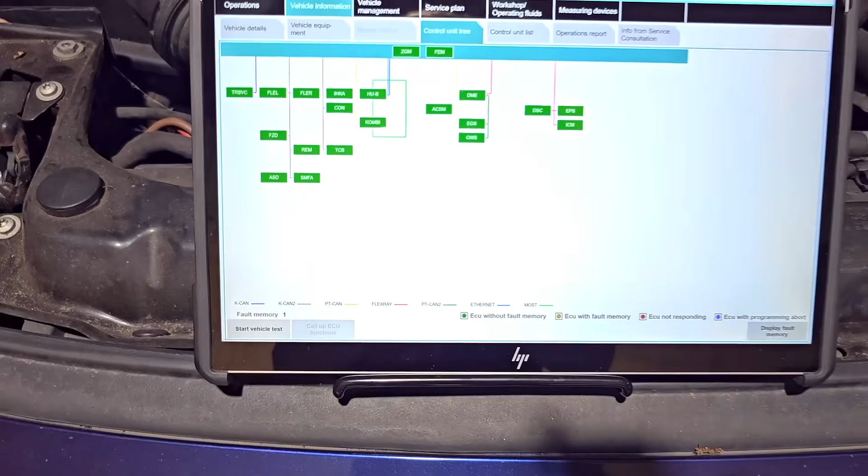And at the end, absolutely no errors. Everything is green, just one single error, the permanent SE fault codes, which is expected. That is a good job. So with this, the car is repaired, and everything will work perfectly.